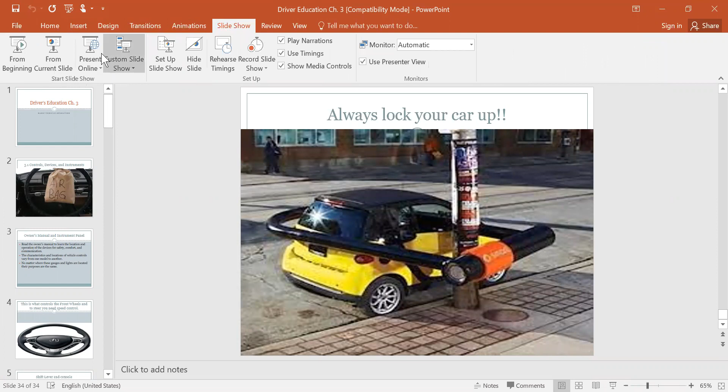Okay, on to chapter 3. Vehicle basic vehicle operation, chapter 3.

If you get a ticket, and then also in the back seat, right? If you're under the age of 18, you have to have a seatbelt on in the back. But the airbag complements the seatbelt. So an airbag is meant for like the serious collision. When you get involved in a rollover crash, you hit something at a high speed, it explodes, and it's been known to...

You wouldn't want to have a small kid sitting in the front seat because if the airbag explodes, it could harm them. Obviously, things like don't put your feet up on the dash. That's important because if a deer runs out in front and it causes the airbag to explode, when that airbag explodes, it's going to come out at a couple hundred miles an hour. It would break your feet, break your toes, break your legs. So keep your feet off the dash.

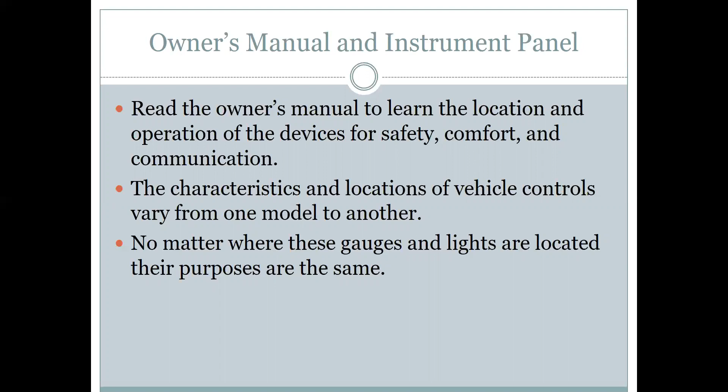So you need to know how to operate the basic procedures of your car. Practice turn signals, practice turning on the air conditioner, practice turning on the heat, practice turning on the defroster, practice turning on the windshield wipers. Make sure you know where the gas gauge is located, all of those important things.

Okay, this is talking about the shift lever. It's used to select a gear. It is commonly located on the steering column or the console. The console is in the middle of the vehicle in the front seats. And then a little bit about cruise control - it's a device that lets you maintain your desired speed without keeping your foot on the accelerator. You should not use cruise control during bad weather like ice or snow, anything like that.

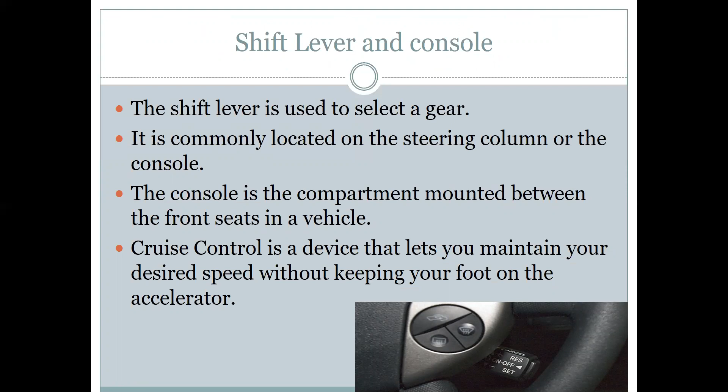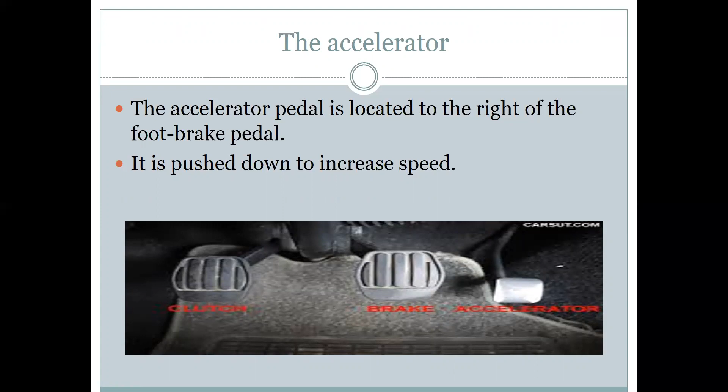The accelerator pedal is located to the right of the foot brake pedal. If you've never driven a car before, you need to know where this is located for sure. You can practice this without even turning the car on. And then the brake pedal there in the middle. And for a manual transmission, over to the left is the clutch. The clutch pedal is used to shift gears, to slow the vehicle down when you're shifting, every time you shift gears.

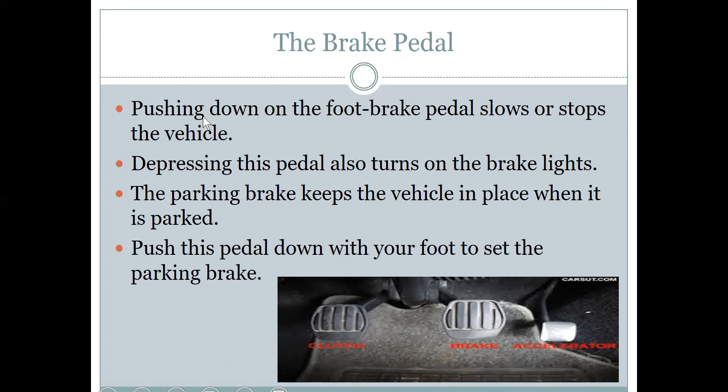So pushing the foot brake pedal slows or stops the vehicle. Depressing this pedal also turns on the brake lights in the back of the vehicle - it's a warning sign. And the parking brake keeps the vehicle in place when it is parked. Push this pedal down with your foot to set the parking brake. And there's a picture of the parking brake. Some are with your left foot pressing on the pedal, and some are just in the middle by the console.

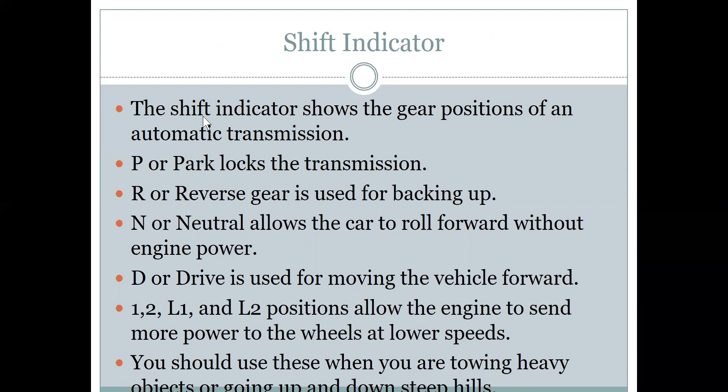Shift indicator shows the gear positions of an automatic transmission. P or park locks the transmission. R or reverse gear is used for backing up. N or neutral allows the car to roll forward without engine power. And D or drive is used for moving the vehicle forward. And then you have lower gears, which allow the engine to send more power to the wheels at lower speeds. You should only use those lower gears if you're towing heavy objects or going up and down hills.

A little more information about seatbelts. Always wear your seatbelt when your vehicle is in motion. Some states require all passengers to wear one. In Iowa, if you're under 18, you have to have it on in the back seat too. Typically, it's a $100 fine if you don't have your seatbelt on.

Head restraints are important too. They're padded devices on the back of front seats, and they help reduce whiplash injuries in a collision, especially if the car is struck from the rear.

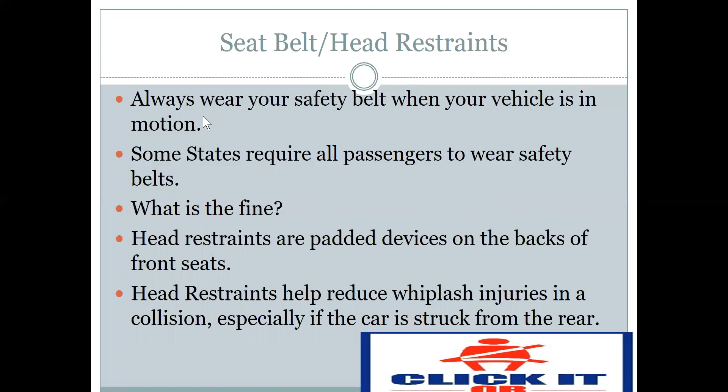Mirrors: the inside mirror shows the view through the rear of the vehicle. The outside mirror shows views to the side and rear of your vehicle.

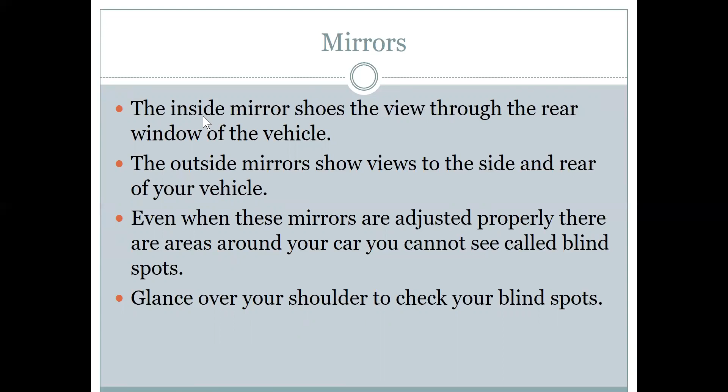Even when these mirrors are adjusted properly, there are certain areas around your car you cannot see, called blind spots. This is where you have to glance over your shoulder to check your blind spot, especially when you're going to change lanes, slow down, or turn. So blind spots are the areas the mirrors don't show.

The horn is usually located on the steering wheel. In some areas, two taps on the horn convey a friendly message.

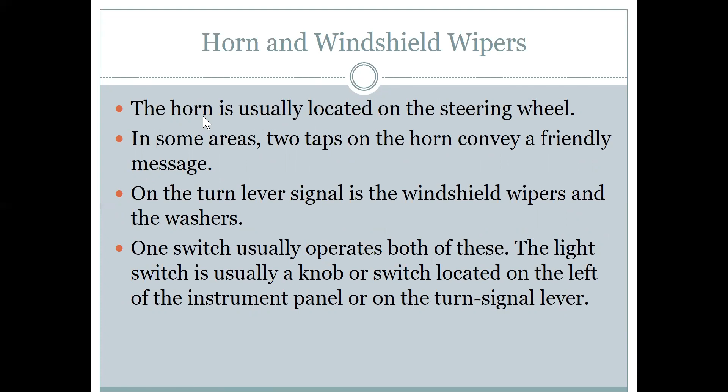On the turn signal lever is the windshield wipers and washers; one switch operates both. The light switch is usually a knob or switch located on the left of the instrument panel or on the turn signal lever. The hood release lever is located on the left side under the instrument panel, and it releases the hood so you can check your engine. Then you have to get out and pull a second lever to open the hood.

The defroster keeps the windshield and windows free of moisture. Sun visors are located above the windshield; pull the visor down or to the left to help reduce glare from the bright sun.

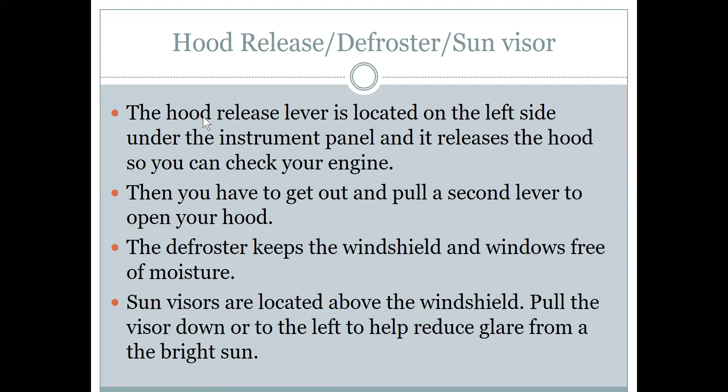Hazard flasher lights: when your hazard flasher is on, both front and rear turn signal lights operate at the same time. It's usually located somewhere on the top of the steering column by a little triangle symbol.

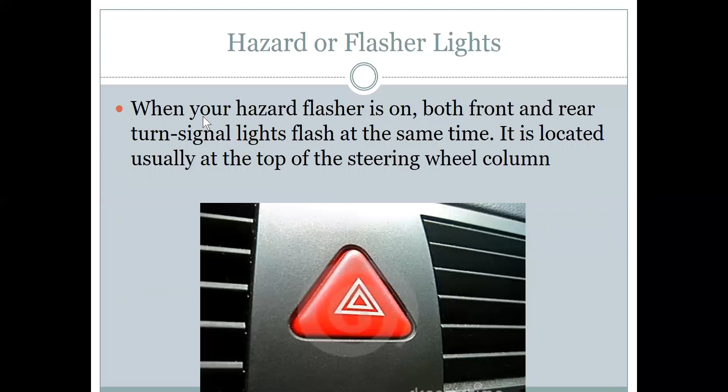The seat adjustment lever is usually located at the lower front or left side of the driver's seat. In vehicles with electric seats, the controls are usually on the lower left side of the driver's seat or mounted on the door.

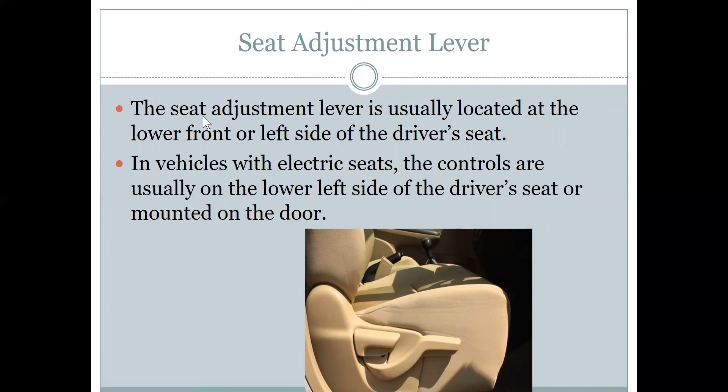The instrument panel contains gauges, warning lights, and sometimes a message center. It is the panel directly in front of the driver's seat. The fuel gauge shows the amount of fuel in the gas tank. The temperature light or gauge warns you when the coolant or engine is too hot.

You shouldn't drive if the temperature light comes on, but if you have to, you can turn on the heater and turn off the air conditioner. You'll be hot in the car, but the engine will cool down and let you drive for a little bit.

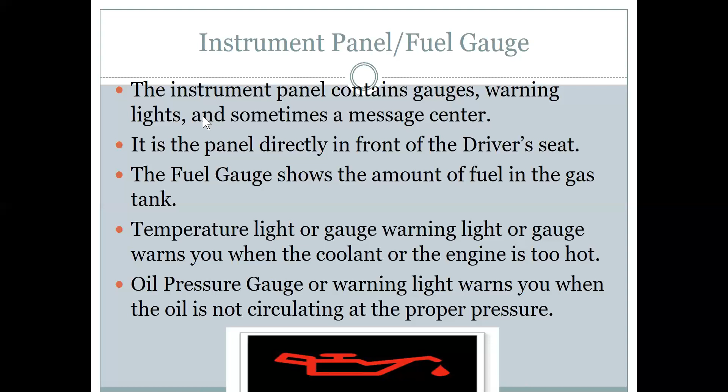If you have the oil pressure gauge or warning light on, it means the oil is not circulating at the proper pressure. I would probably pull over and turn off the car if this light appears, because you could do damage to your vehicle. That's more than I would call for myself as a driver's ed teacher—I'd call somebody to get the car towed and checked out rather than keep driving it.

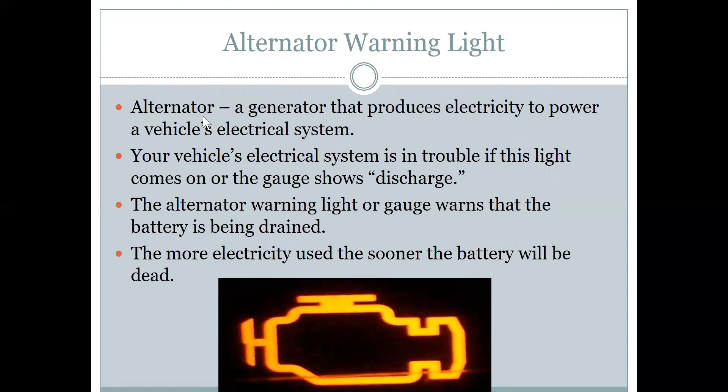The alternator is a generator that produces electricity to power a vehicle's electrical system. Your vehicle's electrical system is in trouble if this light comes on or the gauge shows discharge. The alternator warning light or gauge warns that the battery is being drained—the more electricity used, the sooner the battery will be dead.

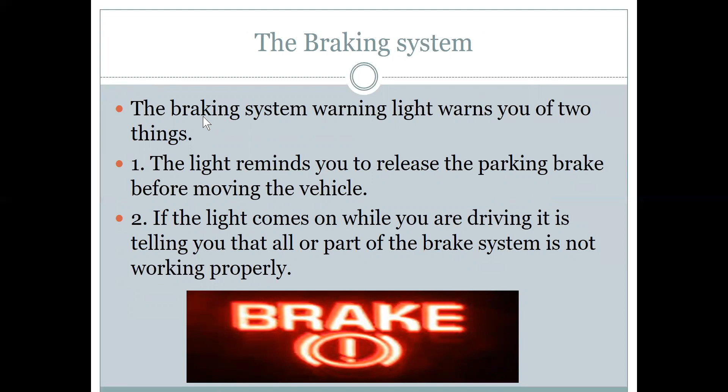The braking system warning light warns you of two things: it reminds you to release the parking brake before moving the vehicle, and if it comes on while driving, it's telling you that all or part of the brake system might not be working properly, so get that checked out.

You have a speedometer, which tells you how fast you're going, and an engine tachometer, which tells you revolutions per minute. Whether you're driving a manual or automatic transmission, you don't want to get your car into the red zone.

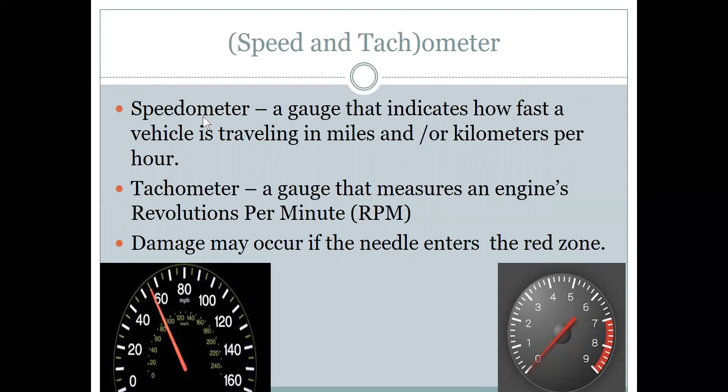The odometer is a gauge that displays the total number of miles or kilometers a vehicle has driven since it was manufactured, shown in the middle there. This car's been driven 77,552 miles. It used to be that 100,000 miles on a car was a lot; now cars routinely run 200,000 to 250,000 miles, as long as you do proper maintenance like changing the oil and having it serviced regularly.

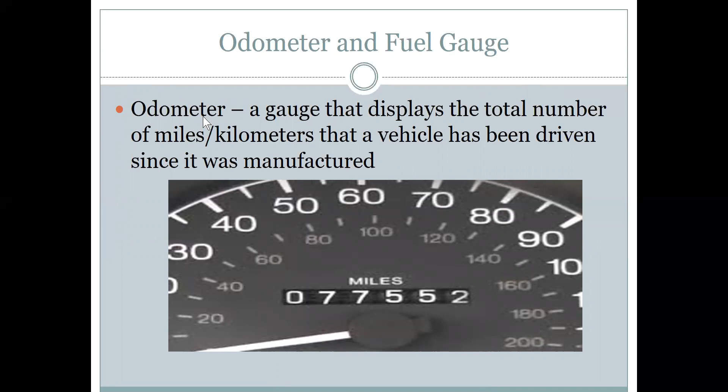Anti-lock braking system light tells you if the anti-lock braking system is functioning properly. ABS allows you to lock your brakes up and still turn the wheel. Older brakes that didn't have ABS would make your tires skid and you couldn't turn the wheel at all. You'd just slide forward.

Kind of like if you're riding a bicycle and you use your front brakes too much, the wheel locks up and you go over the top. If you had anti-lock brakes on your bicycle and used the front brake too much, a sensor would cause it to go on and off to help prevent you from going over the front. Don't try that out at home too much though.

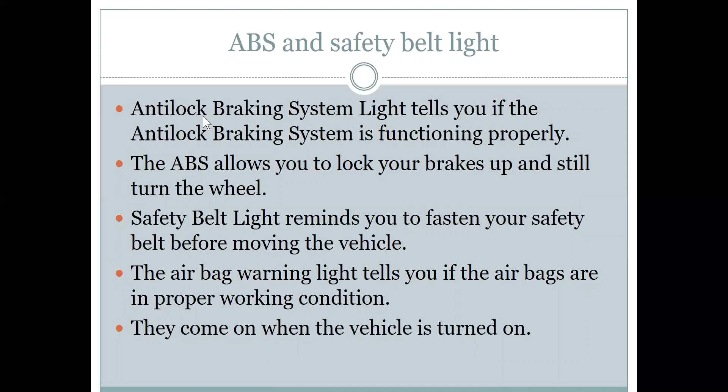The airbag warning light tells you if the airbags are in proper working condition, and they come on when the vehicle is turned on. Turn signal indicators tell you the direction you have signaled to turn. The turn signal lever is located on the left side of the steering wheel column. Push down to turn left and up to turn right.

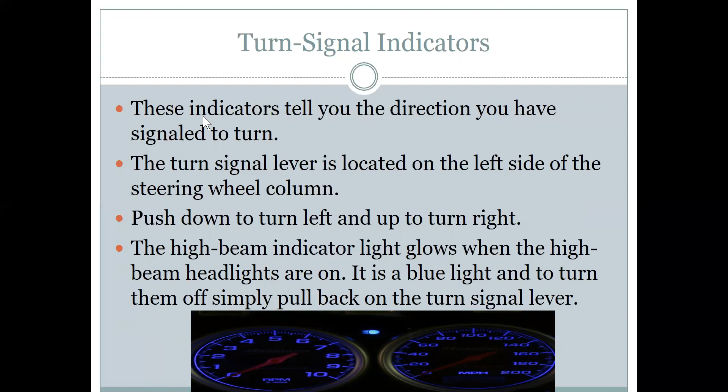The high beam indicator light glows when the high beam headlights are on. It is a blue light, and you turn them off simply by pulling back on the turn signal lever.

If your engine light comes on, you should have your vehicle checked. Many vehicles have a message center light that provides information on important items, such as oil change, low washer fluid, or door ajar.

Newer cars today have key fobs, which you can use to lock or unlock your vehicle from a distance.

When inspecting your vehicle before you get in to drive, these are pre-checks. One thing they talk about: if you get in your vehicle from the side street, walk around the front of the vehicle toward the back. In busy intersections, if you live in a busy area, this might be important. I don't know that it's always important in your driveway, but you don't want to turn your back to traffic.

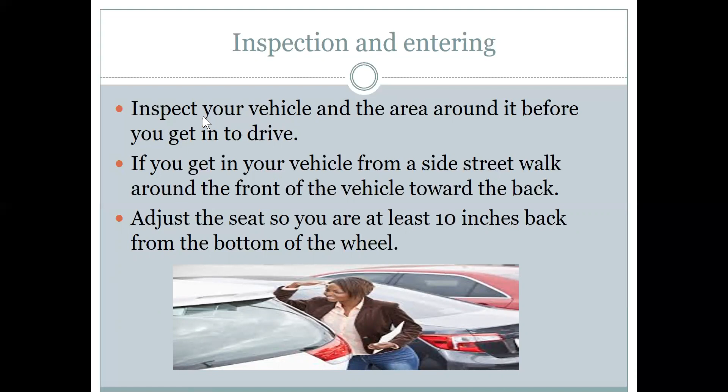When you adjust your seat, you're supposed to be at least 10 inches back from the bottom of the wheel.

Before opening the door, have your keys in hand ready. Again, this is more for bigger city stuff, because you don't want to linger around, like at night or anything. But in the middle of the daytime, in a small town, I'm not sure it's that important.

So what do we mean by look under your vehicle? Just the obvious stuff. If you see a big puddle of transmission fluid or oil, you need to be aware of that and get it checked out. It's just the obvious stuff.

Around your vehicle, look at the tires. Do you have a flat tire? Before you leave the house, it'd be a lot easier to change the tire at your own house than it would be in the middle of a gravel road or a highway somewhere.

Make sure you have a clean windshield. In the wintertime, there's a $100 fine if your windshield is not defrosted. We've all seen people in a hurry to get to school or work who just scrape a little teeny hole in the ice so they can see out of it. That's unsafe, and it would be a $100 fine.

So, clean windows, clean headlights, look inside the vehicle. I would say make sure you check behind the vehicle before you back up, because a lot of times people will just back up right into a car behind them.

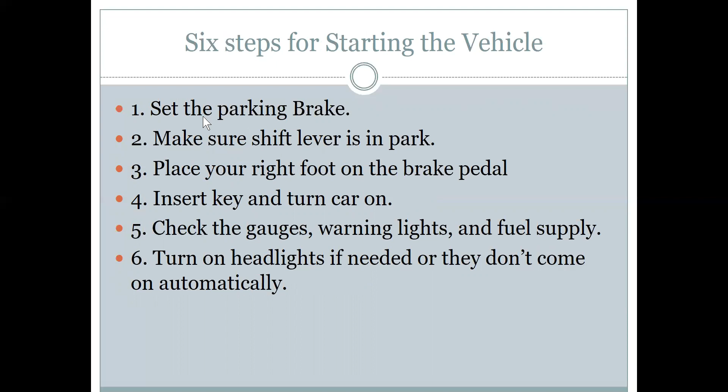Six steps for starting the vehicle: set the parking brake, make sure the shift lever is in park, place your right foot on the brake pedal, insert the key and turn the car on, check the gauges, and turn on headlights if they don't come on automatically.

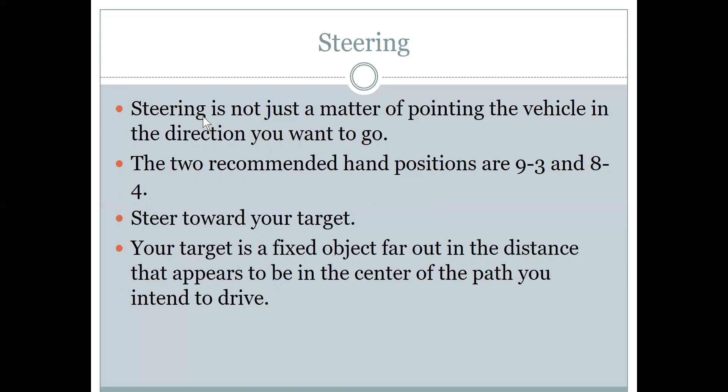I've already talked about this steering part. We recommend hand positions like 9 and 3, or 8 and 4. Don't look over the hood of your car; look far down, 12 to 15 seconds ahead. We call that your target area, so you can identify, predict, and decide things well in advance.

Hand over hand steering is the best method to use when you need to make right turns or quick steering actions. We just don't want you flipping the steering wheel.

Begin with hands at 9 and 3. For a right turn, move the right hand down to 5. Move the left hand to 12 and pull it down to 5. Cross the right hand over to the left, to the 12 and the 5. Straighten the wheel. To make a left turn, do the opposite, starting with the left hand at 9.

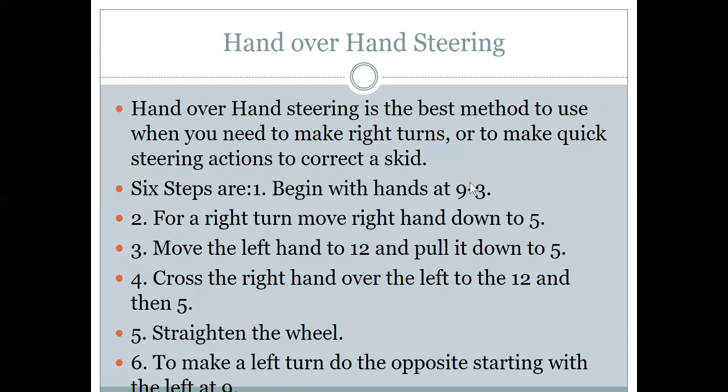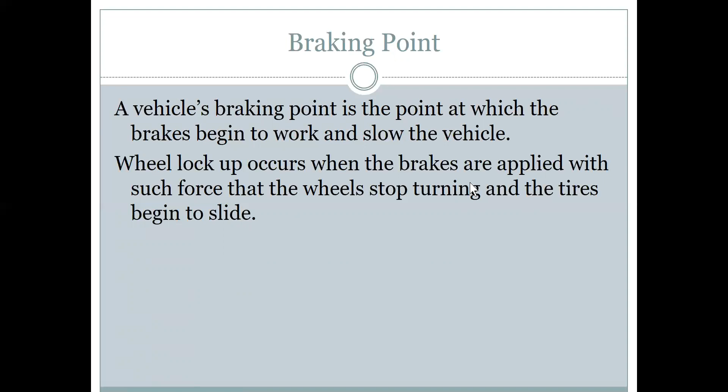And always lock your car up. Okay, that's it for chapter 3. Thank you.